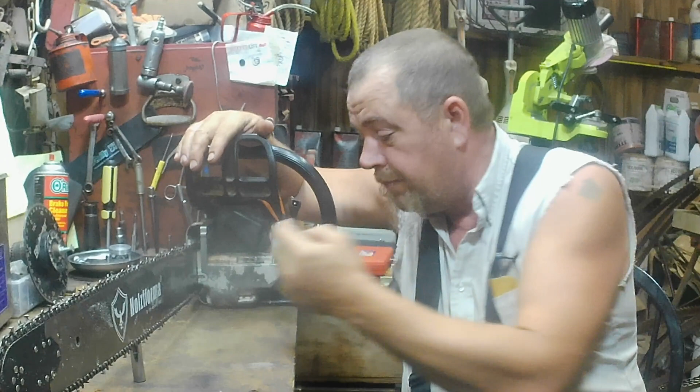Offsetting this cylinder, I think, is going to be a neat video. And I'm going to tell you right now, I do not like promising stuff and not delivering. So I'm telling you right now, this cylinder is already offset, and I've already put her on dyno. I love it. I'll show you what the horsepower results were, and show you how I did it.

That'll be on another video, but it's already done. So I try not to tease something that I never get to - I try not to do that here, guys. And I'll be 100% honest with you, this 2-ring video we're showing today is not going to be the be-all end-all of that.

I've got an email sent in to Ryan at Wolf Creek Saws, hopefully he can get me some more 1.5 millimeter, 47.5 millimeter rings for this saw. I've got some more testing I want to do, but part of that's going to have to be after I do this next mod, and that'll be its own video as well. I've not done that yet, so hopefully I'll get that pretty soon.

Since it's important, that other issue I found, I want to show you that right quick here on paper. I want you guys to get your thinking caps on, your bifocals, and your smart duds. Get your smart duds on right now. Clean out from under your fingernails with a toothpick and dig out your ears with your keys and get ready, because I've got something to show you.

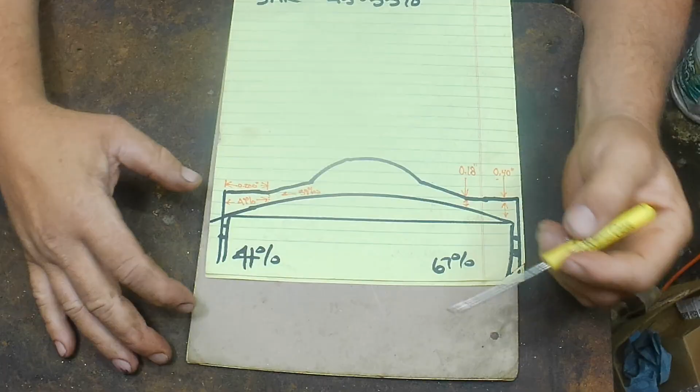Alright guys, I'm looking at this upside down with you. Here's the piston, and the dome on the piston. This has got a dome piston in it. There's the edge of the piston, there's the edge of the cylinder, and basically the shape of the cylinder and combustion chamber.

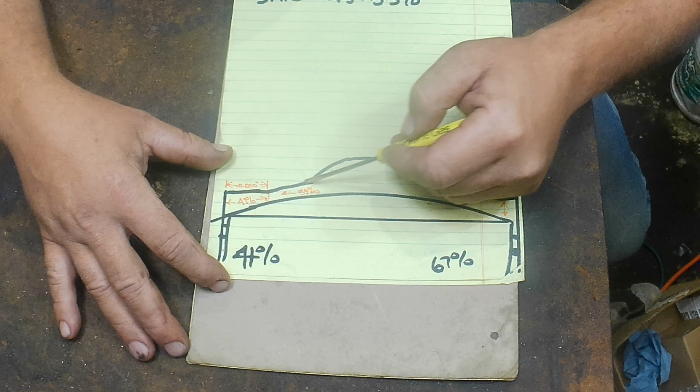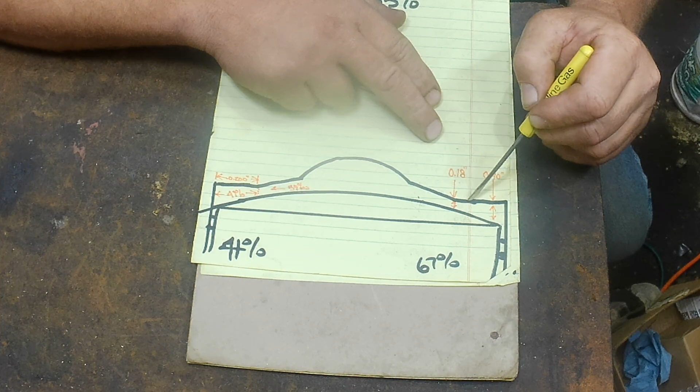There's your rings, okay. We've got a dome on this piston that goes all the way to the outside. It's almost like a French curve, it's not the same radius all the way through here - I just drew that with a trash can lid, so forgive me. But the top of the piston, or the top of the cylinder here, the squish band area, is about 200 thousandths, okay? Now my squish right here is 18 thousandths.

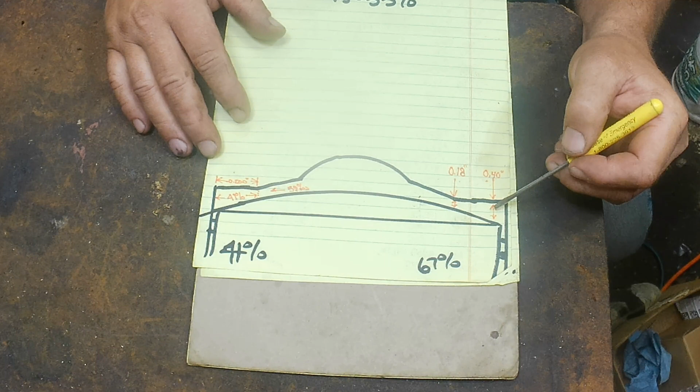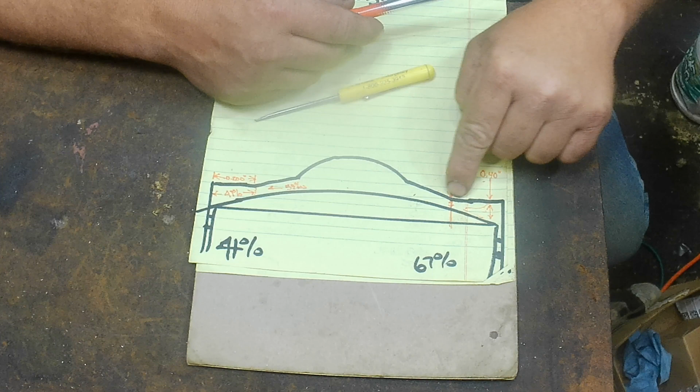I've got 18 thousandths squish on that, okay? But that dome continues to go down. Out here at the edge, we are at 40 thousandths. At some point, whatever we trap here is going to want to be squeezed this way, right? That is no good. So I think that's exacerbating our problem of blowing stuff by our rings due to this shape of the top of the piston.

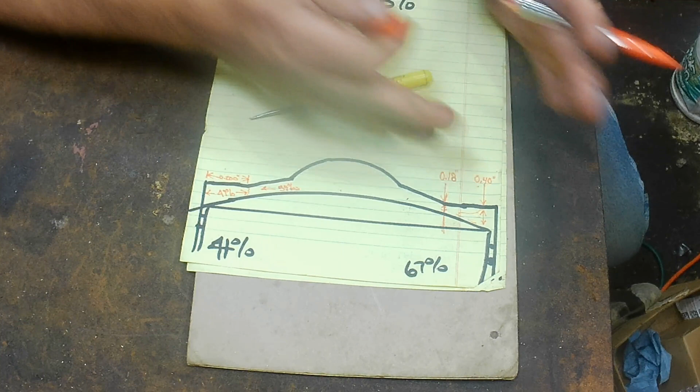This is basically perpendicular to the cylinder wall. The squish band in that cylinder is basically perpendicular to the cylinder wall, but the piston's domed. So therefore, we are causing a triangle that's trying to push the air that way instead of a nice triangle trying to push the air towards the squish band.

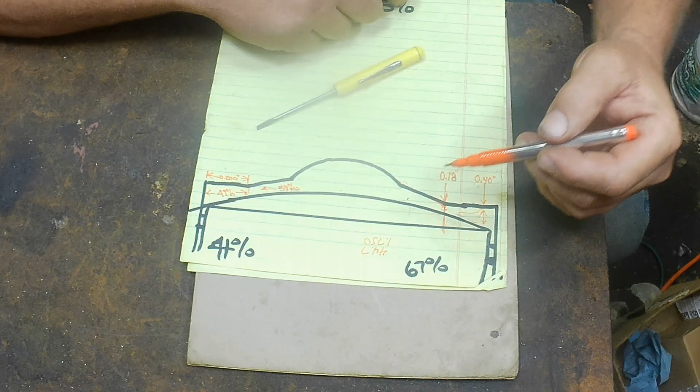And you're thinking, well, that's only 200 thousandths, right? Well, this is - and I can't write upside down - this is a 44.7, which is 1.750 give or take, inch and 3/4 bore. Well, 200 thousandths of that, and that's all the way around, so that would be 400 thousandths, 200 thousandths on this side, 200 thousandths on that side, which leaves us 1.350 in between here and here.

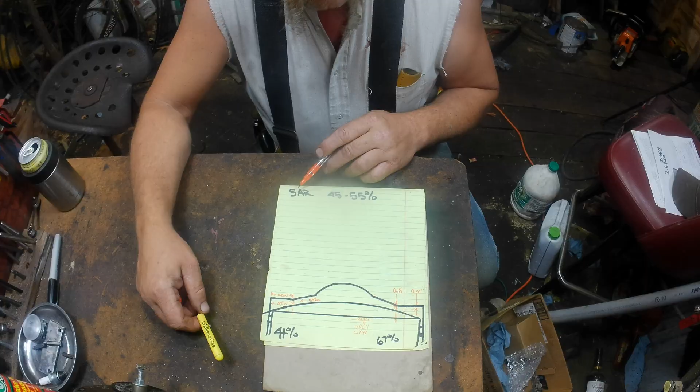And the reason I mention that, guys, they claim the squish area ratio - this is the motorcycle people and the two-stroke guys - a good squish area ratio is 45 to 55%. I don't know if that holds true for chainsaws or not, but my squish area ratio in here, I wanted to mention, is 41%, okay, which isn't too bad.

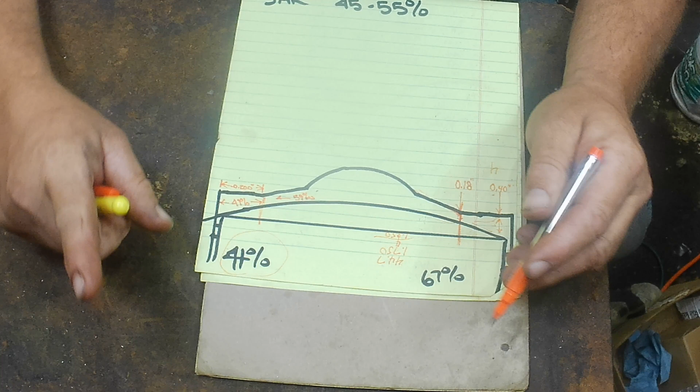And I was talking to another guy today on the phone while I was building chicken wire fence to keep rabbits out of my garden. Man, they're eating me up.

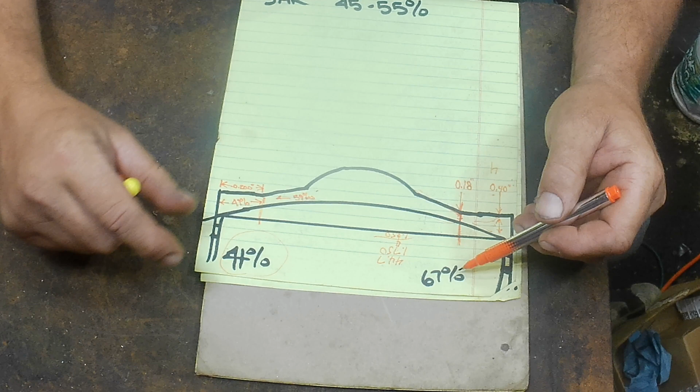He said he had about a 3/8 of an inch squish band in a 45 millimeter cylinder, so he's running up there around 67%. He's got 67% of this area on top of the piston as squish band. Guys, anybody that knows circles and area knows the farther out you get, the more your area is - kind of like taking the inside lane. This area here is 41% of this whole area. This is almost half the area from here to here, that's 4/10 of the area from here to here. The other 6/10 is just from here inside.

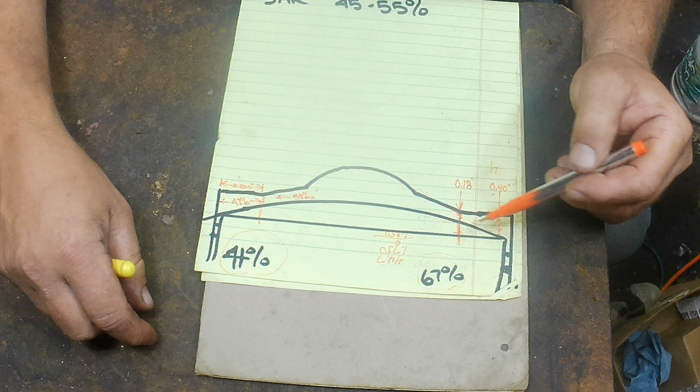So guys, what I'm doing is I'm squishing 40% of my intake charge the wrong way. And I imagine that's forcing that down past them rings instead of slowly guiding that up. So I wanted to show you that problem.

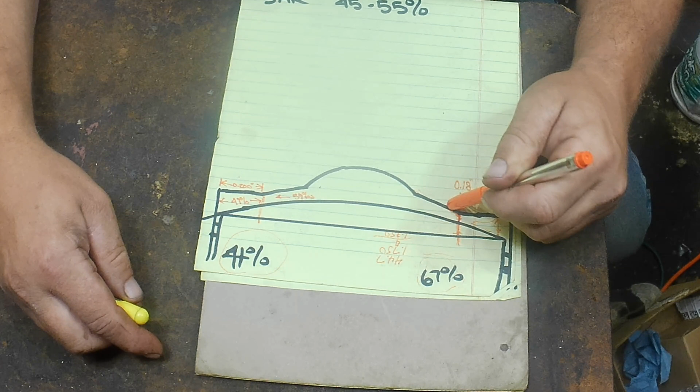How I fixed that's going to be on another video, but I wanted to show you that problem for this video, because I think it's important in our 2-ring testing, since the weaker rings are going to exacerbate that problem.

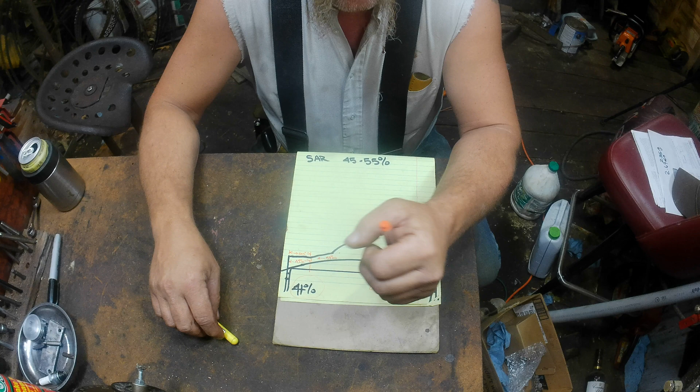Well, guys, I hope you ain't afraid of worms, because we have opened up a pile of worms.

Seen the guy doing thin rings, reduced tension rings on the YouTube, and of course he said, yeah, that's thin, man, you really reduced, you can feel it. Well, my resolution on my computer ain't too good, so I don't know how to, I can't feel what he's feeling. So I don't know how much is too much or how much ain't enough.

So I've got these 3 sets, and I think I figured out a way to measure the tension. I can't explain to you the difference in tension, it is just drastic. I want to measure it, make it quantifiable, so if anybody's watching this and wants to try to duplicate it or stay away from what I'm doing, they can know how bad I did it or how good I did it. I like to put numbers to it so somebody else, playing the home game, can try it too.

That's all I'm doing. I'm playing the home game. I'm just putting it on the YouTube for y'all.

I'll set you up over here. I've got a scale mounted to the wall, a little groove cut and a magnetic deal so I can hold that ring in there. I've got a piece of 15 thousandths shim in there. These rings were all about 11 thousandths on ring gap, so we're close. I'm gonna put pressure on that to hold it, then let pressure off of it until that drops out, and that's gonna be our measurement. Scientific? I don't think so. Best I can do? Yeah, so far.

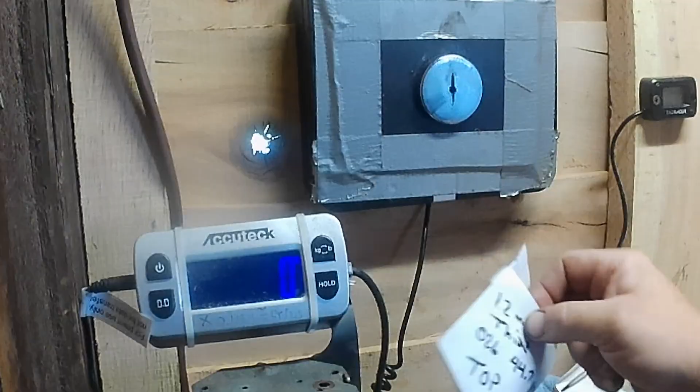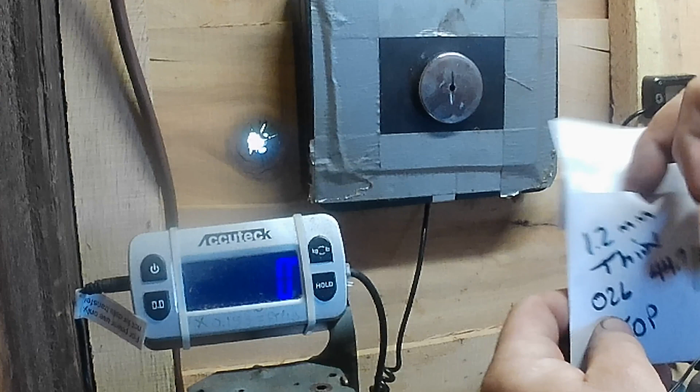Okay, guys, I've showed you before what I do here. I just fold an envelope in half and tape it, cut the flap in half, and I can keep my rings separate, top and bottom. I think it's important once they're breaking in. Another thing is, I'm going to be having my head in here awful close, so I got my hat off. Don't laugh at the back of my fat head.

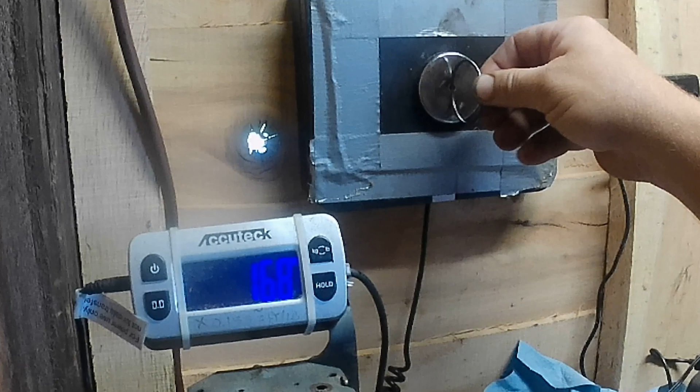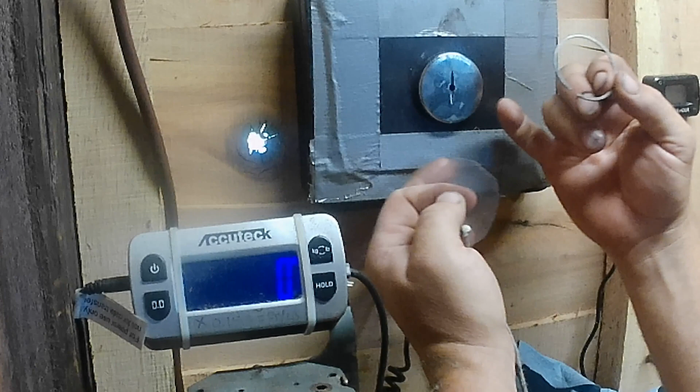Hopefully you guys will be able to see it. What I'm going to do is, we're zeroed out. I'll be able to hold this ring gap closed. I got a groove cut right there, and I got to hold it straight, with that ring gap about straight down. It takes quite a bit to close it, we're on grams, kilograms here. I'm gonna hang this in there until it drops out, and I got to try to release it slow enough where we can get a good measurement, and I can't brace my hand against here because that throws it off. So I got to get in here close, guys. I'm sorry if my head gets in your way. As long as I can see the measurement later, I'll get them for you.

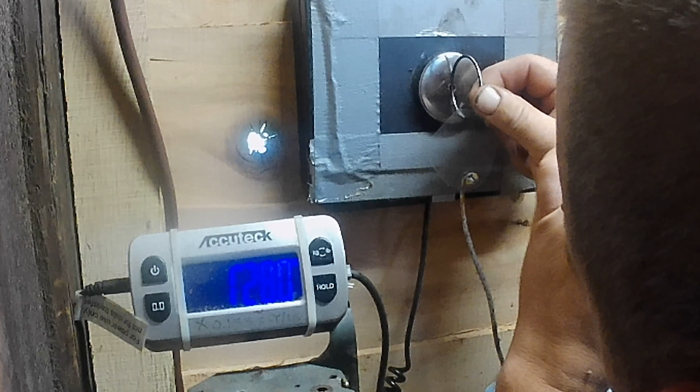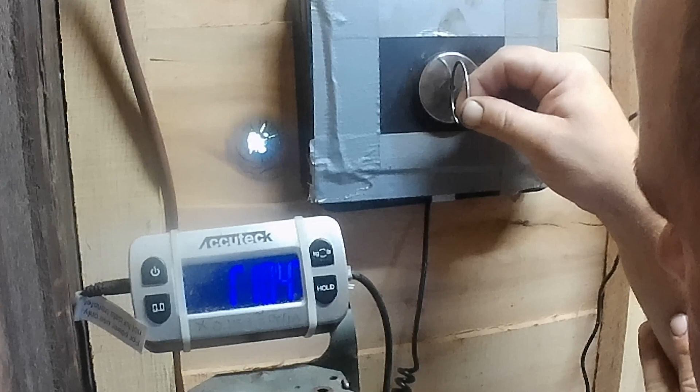That was the top ring, guys, of just an unmodified set of rings. I can kind of watch this ring and make sure it's parallel and plumb to each other, because if I turn it sideways, it turns that plastic sideways, so I can see if that plastic turns, I know I don't have a straight push on it. Let's do a third time.

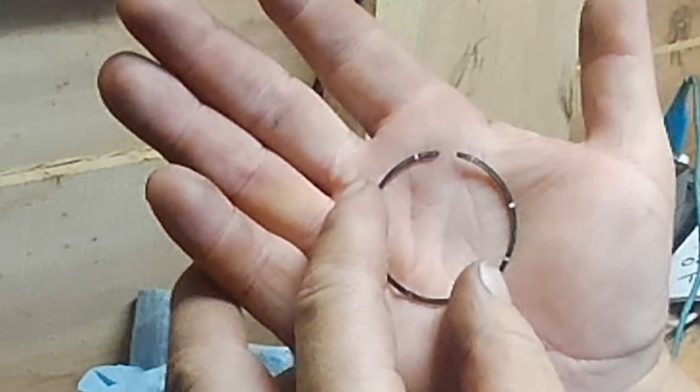No, those are the 1.5 millimeter rings. There's the top ring, and these should maybe be different because those are gas ported on top. Now they're not gas ported as much as the 1.2 millimeter rings.

Quit shaking like a dog pooping peach seeds.

Right there is about where we dropped. Now we'll go to the 1.2 millimeter rings, and it's gas ported, and it's gas ported twice as much. There's 16, or actually there's probably 15 because I skipped the one where the ring gap's at, went for an odd amount that way. That's the first one I gas ported.

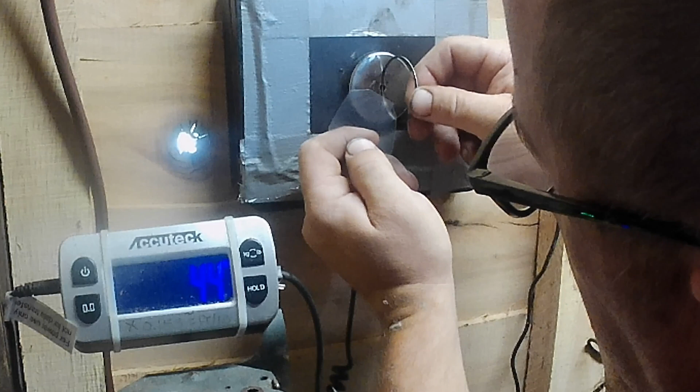There she is, there's tension on her. That's the 1.2 millimeter rings. Man, they ain't got no tension. This one actually ran better than the 1.5 millimeter rings, but those rings were scored a little.

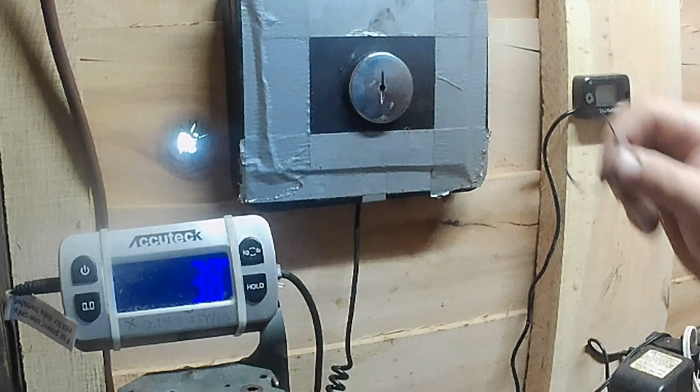Of course this one was on the... I don't think I could have got it any closer than that. It slipped out. That was perfect.

This one ran pretty good, but the timing on the piston was different. So, I know I haven't done a good job on this for you guys because I've had too many variables that I can't remove, or I didn't. I wasn't set up. I didn't have enough sets of rings to remove the variables.

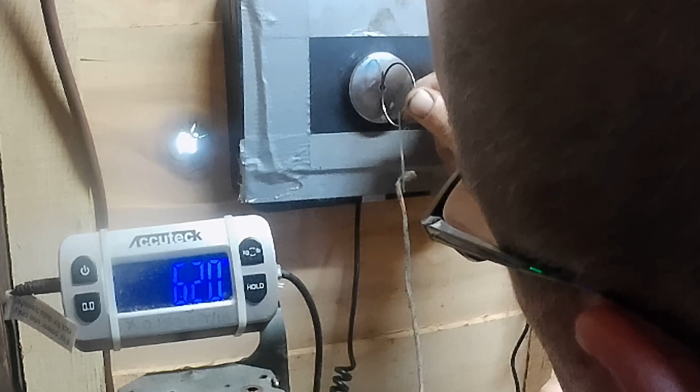Let's see where we're at. Oh, got sideways on it. That's wanting to turn sideways. Let me get a twist out of that rope if it's got some. There we go. Let me try her one more time. This is the bottom ring on 1.2 millimeter. There we go. Well dadgum, that was more fun than a barrel of monkeys, wasn't it?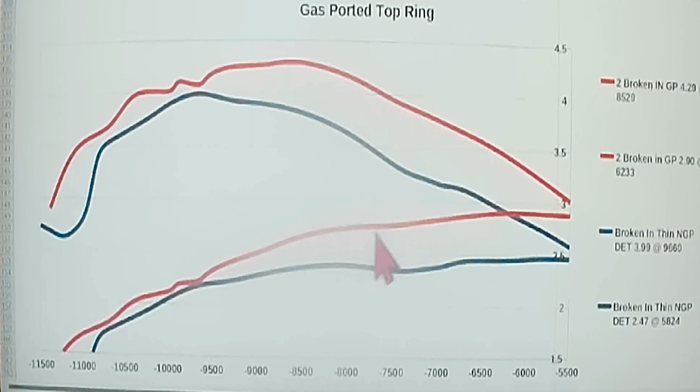Now to compare this gas ported thin rings to my old backup rings, theoretically neither one of them seated, and we seen about the same thing. We climbed torque on the broken-in gas ported rings as the RPM dropped down. We gained on torque, and we gained peak horsepower, 4.29, which again was 8520.

The backup rings peaked out a little higher at 9831, but it only peaked at 4.22 horsepower, which isn't much. You'll notice I got this marked faster and colder, meaning for kicks and grins I did a faster dyno run while the saw was cooler.

Guys, that's where you've got to trust your dyno, or dyno guy, or the operator. I pulled about a 10-second run. Usually I do about a 30-second run, but I pulled a 10-second run, and the saw was a little cooler.

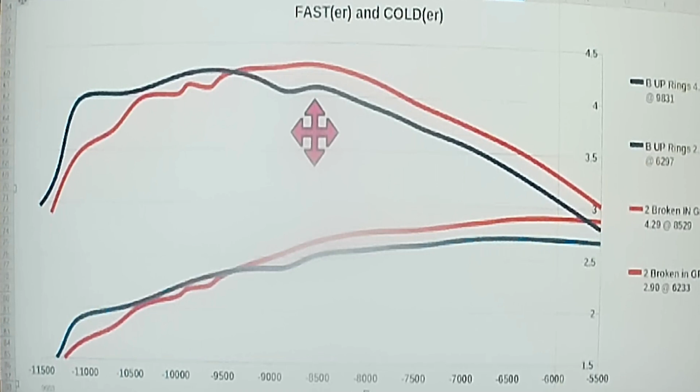It was still warmed up, but cooler. Okay, and the reason I did that, I want to show you — this is backup rings, this is a full set of rings that are not thinned.

Hotter versus colder. Now, I don't usually do a cool dyno run, and the only reason I did on these thin rings — I'll get into that in just a minute — I wanted to show you the difference between running a saw a little cooler and running it a little hotter on the dyno. These rings were exaggerating that over what I've seen on a normal ring, but I do want to show you the difference.

My backup rings, cold, blue being cold, 4.22 horsepower at 9831. Okay, and we'd expect that. The backup rings, we dropped 0.2 of a horsepower by heating it up, and it's not hot — it's been up to 300 plus degrees and cooled back down to just below 250 to start the dyno run, and it's a little bit longer run like I usually run, about 20 seconds.

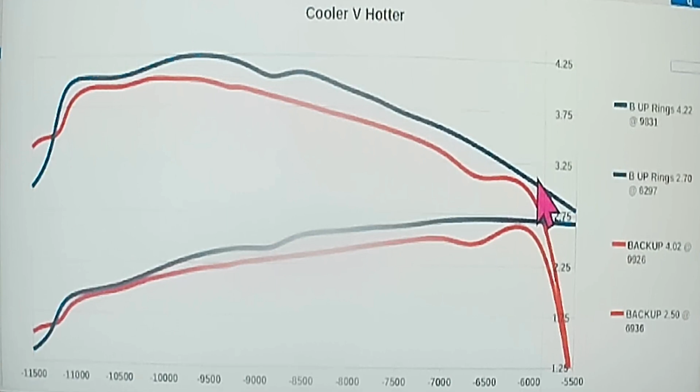So you're going to see a little bit more heat saturation in this backup rings run. And the reason it's working here too is these rings aren't seated in — I'll get into that in just a minute.

Same with thin rings, I want to show you something on that. She just dropped off about 6,000 RPM — dropped right off there, and that's what we were seeing in the last video. That's what I was hoping you guys would pick up on in that last video when I was actually sawing.

Guys, you can make a heck of a bunch of difference, and it wasn't cold — it's 80 degrees outside, and the saw was warmed up. I just didn't have it as hot. So the red line's by no means overheated, but it's hot — it's warmed up and hot.

We're going to lose some RPMs there, and I want to show you that, but I've got one more thing I want to show you right here in the middle.

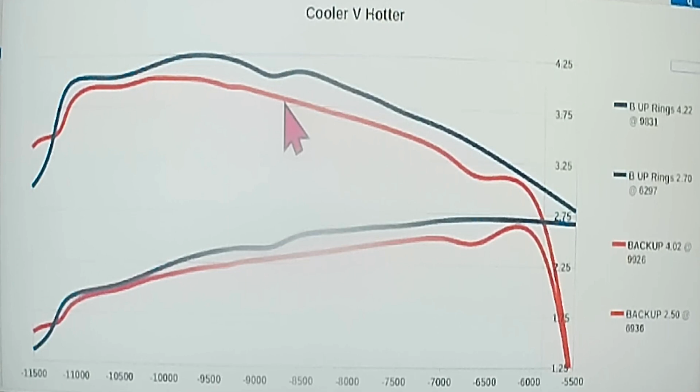What we have here, we've got three lines. We've got the old two rings that were broken in at its current configuration, and everybody knows we've been ahead of that before with timing advance and everything else, which raised all this, but we're back to basically stock as far as timing, spark plugs and all that. It's just easier to replicate from dyno run to dyno run, so I went backwards a little bit.

But you'll see that the good two rings that's been seated in — they probably got 20 tanks on them — had just a little bit more horsepower, and the max torque was lower. It started dropping off about 7,200. Bear in mind, this green one's a warmed-up saw versus these two runs which are cooler.

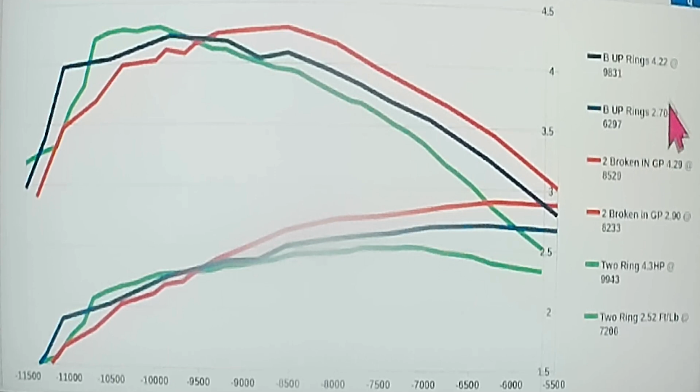This thinned-out two ring is giving me hope, and the real neat part of this whole experiment boils down to these charts right here. There's two charts here, I'm going to go over them both with you. The next one's going to show it a little bit different, and I think a little bit better.

What this is, when I do my heat pull and pull this down to whatever RPMs it'll hold at 10,000 RPMs for 10, 20, 30, 40, 50, and 60 seconds.

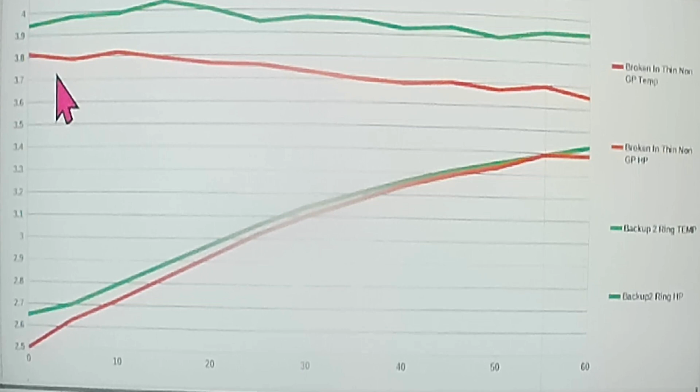I took a data point about every 5 seconds. Now what you'll notice is the green line is the set of backup rings. They're not blowing by bad, those are the non-gas ported ones. The gas ported ones did a little bit better, but I want to show you the exaggeration here.

We were down on horsepower, which is not a surprise. We went from 3.8 horsepower to about 3.65 over the heat range, which I started out a little cooler. This one was up at 265 because that's where I finally got it settled in while running the dyno. I usually run it down to about 240 and hope to have the dyno settled in at 10,000 RPMs by the time it hits 250. I was at 265 by the time I got it settled in, which would have been a bigger hill to climb for the green line, which is just my backup rings.

We started out like 3.95, 3.94 horsepower here and wound up at 3.93 horsepower, only 1/100 of a horsepower from 0 to 60 seconds. We hung in there like a hair in a biscuit, kind of up and down, because I'm having to adjust that the whole time as the saw warms up, and as the fluid warms up it flows easier, so I have to adjust that valve just a little bit. This one heated up about the same, along the same curve, but it dropped horsepower a lot faster.

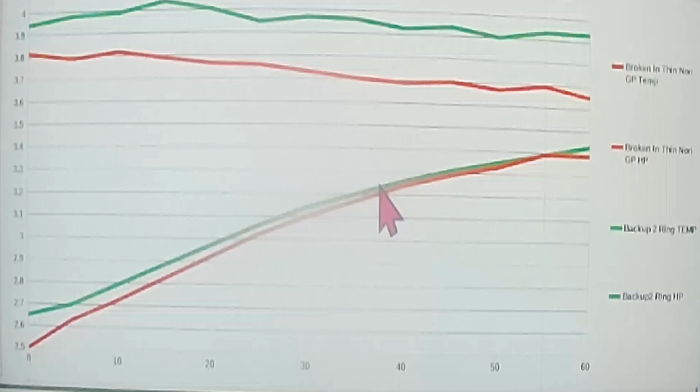I think we've got some things to do to try to fix that, which is probably a new cylinder, one that doesn't have these scores, a better cylinder, and not thinning my rings so much.

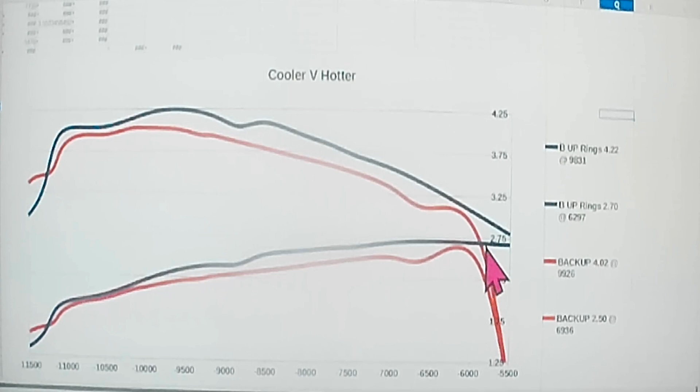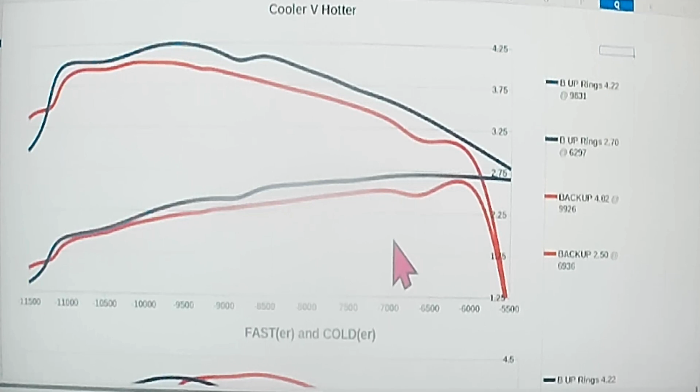I just told on myself of how you can basically run a dyno and make it cooler and hotter. I'm honest with myself, I don't play that trick and try to show you guys, but I wanted to show you that to let you know how we're going to start running that dyno just a little bit different, and making sure that doesn't happen in the future. Don't miss that cylinder offset video.